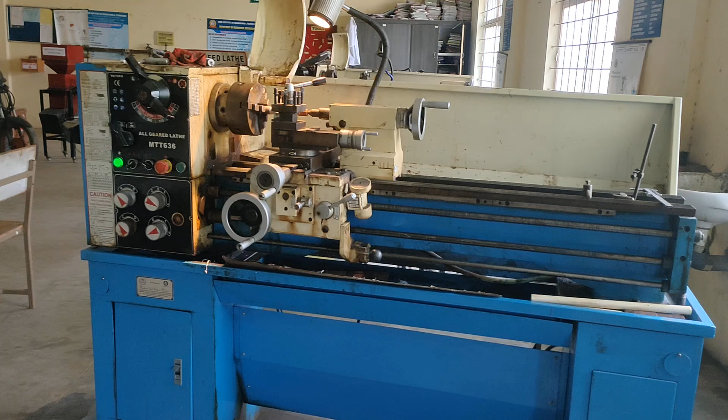Hi friends, today I am going to explain how to do one more lathe operation, that is the taper turning operation. How to do the taper turning operation with the help of the compound slide method. So let's see the operation.

Before doing the operation, coming to the aim of the experiment: to perform a taper turning operation with the help of a compound slide on a given workpiece using a lathe machine. So that is the aim of the experiment. Coming to the material required for this particular experiment, we want one lathe machine.

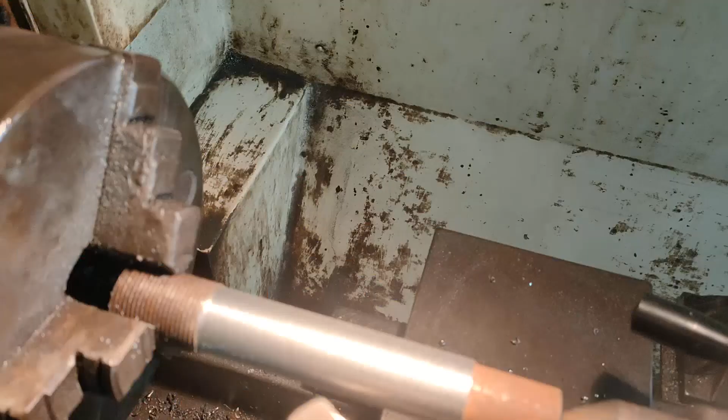Let's see what are the tools required for this operation. One workpiece and chuck key, one marking block for centering operation, one vernier calipers. So these are some of the tools required for doing the taper turning operation with the help of the compound slide method. Let's come to the taper turning operation.

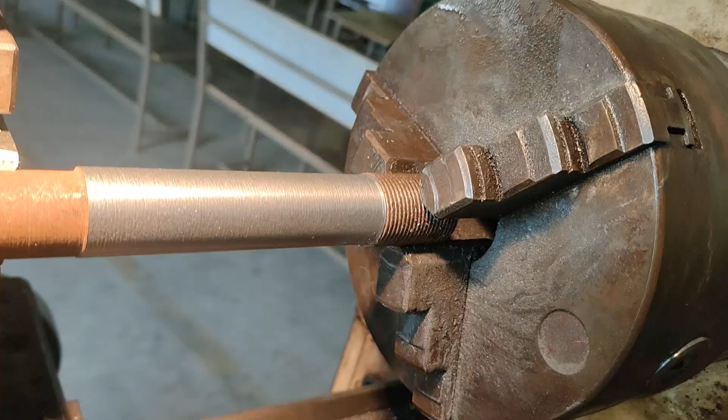First of all, you have to take one workpiece that should be fixed on a 3-jaw chuck in this way. Then you have to take one cutting tool, a taper turning cutting tool like this, that should be fixed on a tool post in a similar way. Now coming to taper turning.

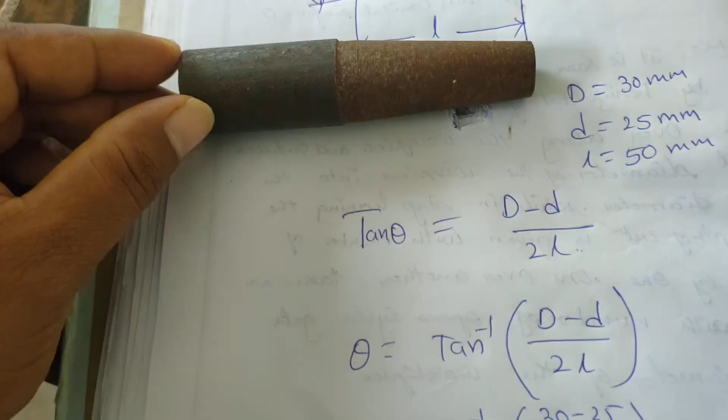What is taper turning? Taper turning is nothing but changing the diameter of the workpiece. So this is the diameter of the workpiece. Changing the diameter of the workpiece from one end of the workpiece to another end. So there is a slight change from one end to another end. This operation is called taper turning.

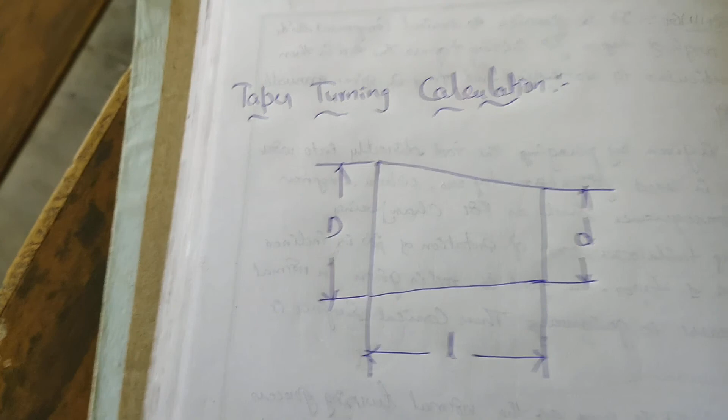Let's see the experiment. So this is the major diameter of the workpiece. This is the minor diameter of the workpiece. This is the length of the workpiece. I have taken the diameter as 30 mm. So this is the 30 mm. This is the minor diameter as 25. Length is 50 mm. So this is the minor diameter 25. This is the length of the workpiece.

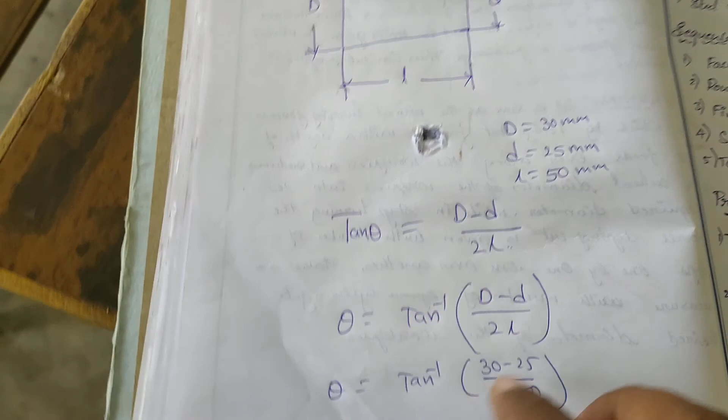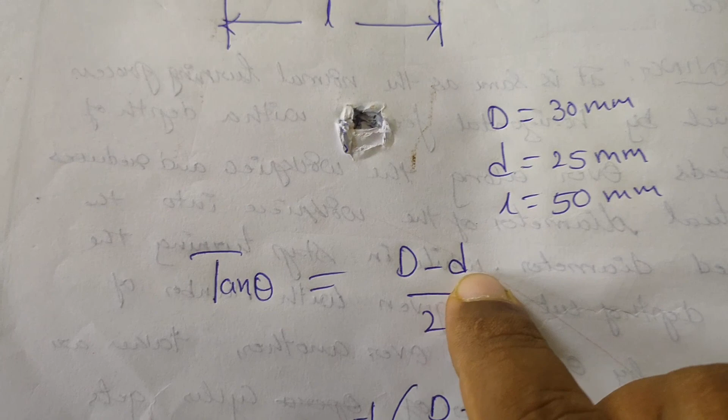So coming to how we are adjusting the angle. For adjusting the angle, we have to take tan theta equal to (D minus d) by 2 into L, where D is the major diameter, small d is the minor diameter, and L is the length of the taper. So this is the length of the taper. So after doing calculations, theta equals tan inverse of (D minus d) by 2L.

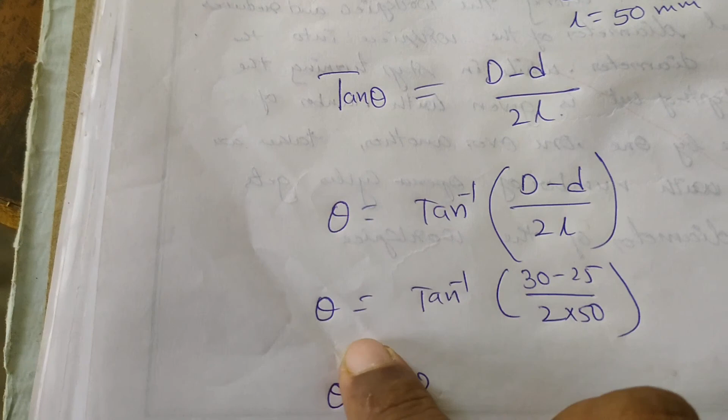So after calculations, we will get some value. We will see the adjustment of this particular value. So we will get 5 or 6 degrees. We can do the calculations.

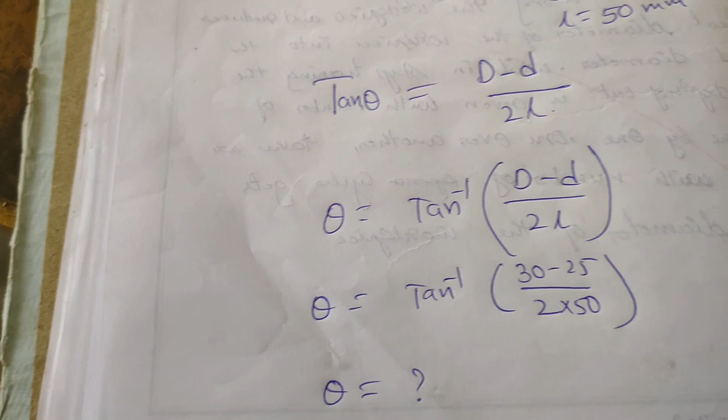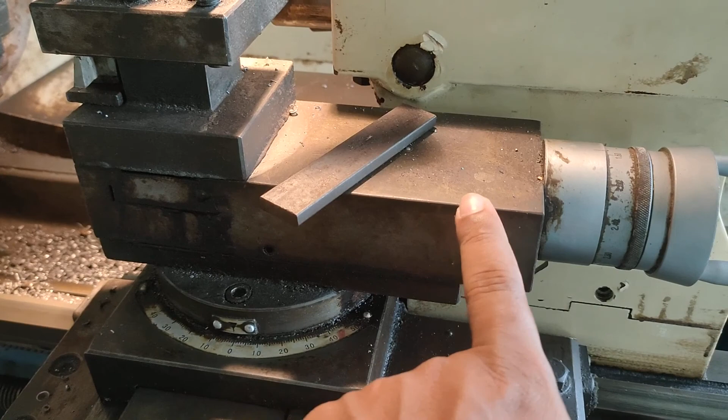So now coming to the compound slide method. This is the compound slide. The compound slide method is mainly used for producing short length tapers on a given workpiece. This is the short length job. So if you want to produce short length tapers on a given workpiece, you should use taper turning by the compound slide method. So this is the compound slide.

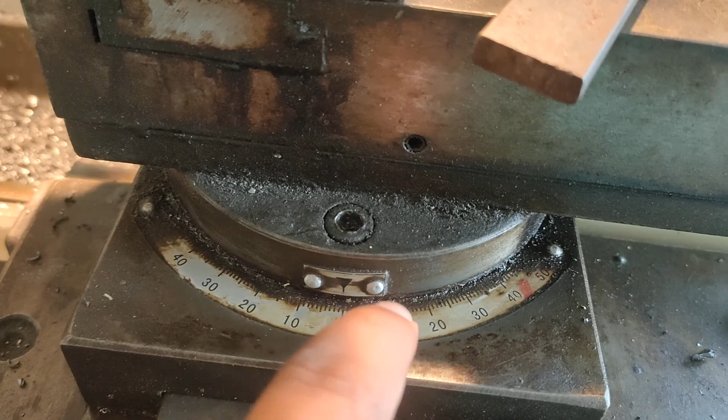By using this particular device, we are producing a taper on a particular workpiece. That's why this is called taper turning by the compound slide method. For doing the compound slide method, this is called the swiveling plate. So this is the swiveling plate. You have to adjust the angle of the taper. So I have taken the angle as 5 degrees.

So this is 0 degrees. Now this position is 0 degrees. I have to change the angle to 5 degrees after calculations. So according to yours, you can take your own angle.

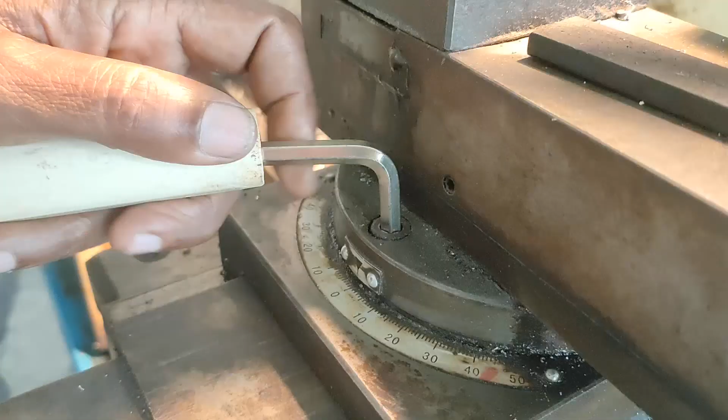So I have taken here 5 degrees. So now I have changed the 0 to 5 degrees. Let's see how we can change the 0 to 5 degrees. If you want to change the angles on this particular swiveling plate, you can loosen this particular screw. So I will loosen this particular screw. Let me see. So in this way we can loosen that screw with the help of an Allen key.

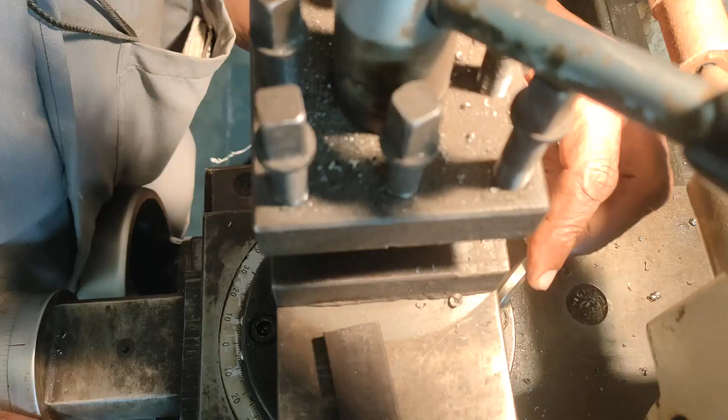This is the swiveling plate screw. To loosen that swiveling plate screw, we are using an Allen key. At the rear end of the compound slide also, you have to loosen this particular screw. This is the particular rear end screw. There is one more screw. We can loosen that screw also. So this is the front end screw. This is the rear end screw.

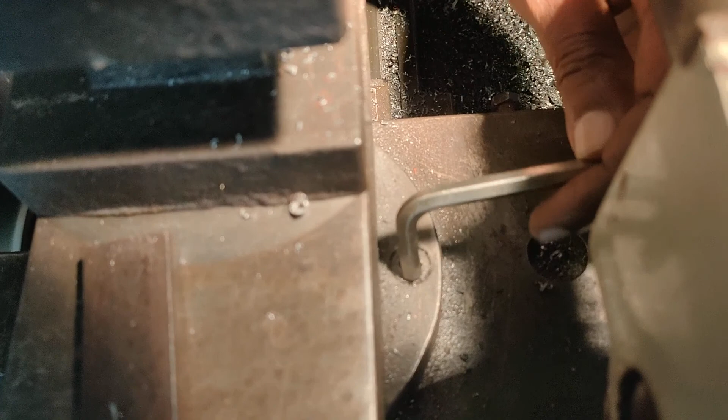So you can loosen that screw also. You can loosen this screw as well as this screw. So in this way you can loosen that screw with the help of an Allen key. This is the rear end screw, rear end of the swiveling plate. Now I am adjusting the compound slide from 0 to 5 degrees. Let me see.

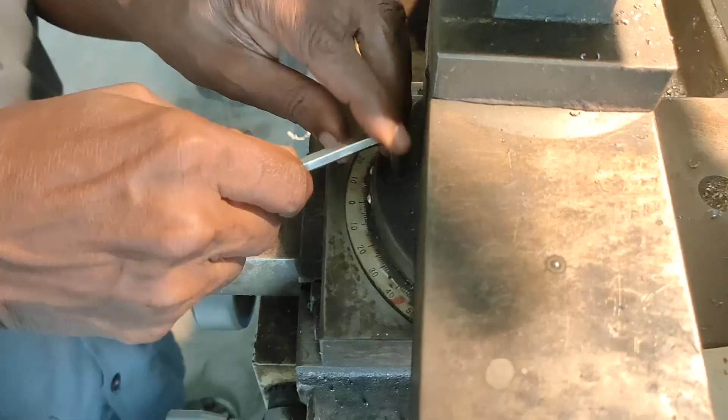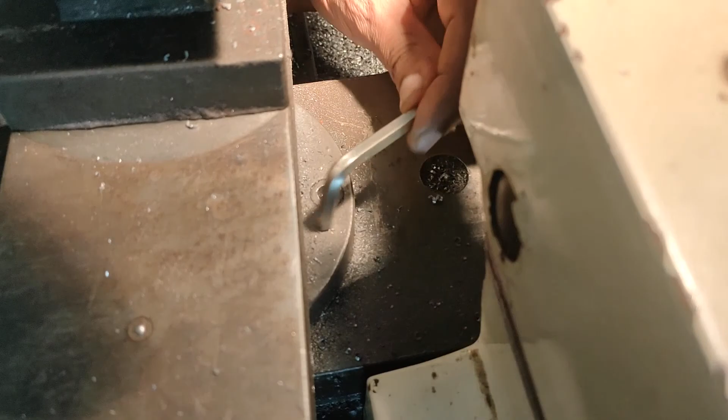So this is the 5 degrees angle I am using here for producing the taper. So in this way you can adjust the compound slide by loosening the screws on the swiveling plate. After that you can tighten the screws with the help of the Allen key. So in this way you can tighten that. In the rear end also, in the same way. So you can tighten this. In this way you can tighten the rear end screw also.

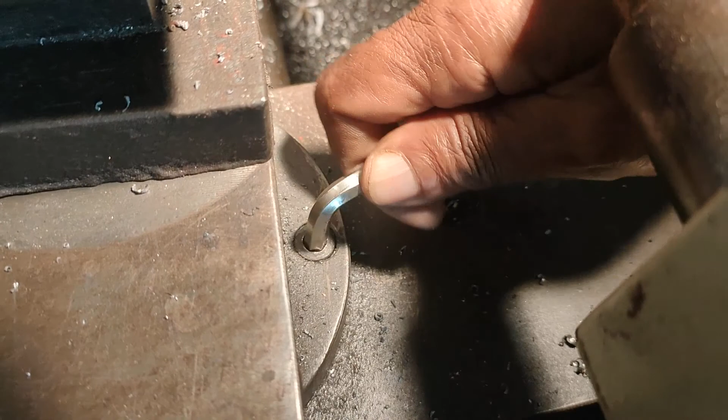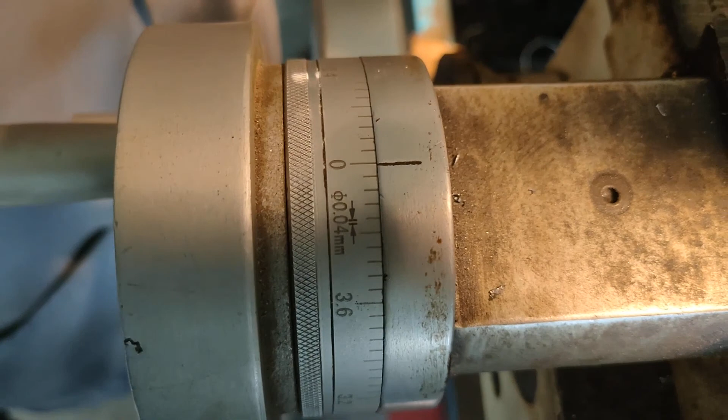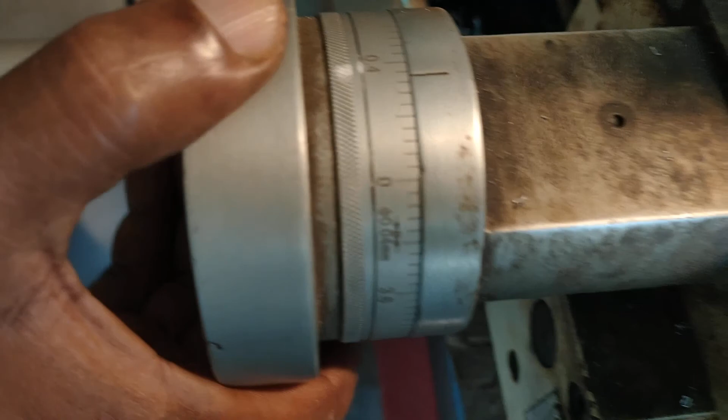Now you can contact the cutting tool with the workpiece. So there is a light contact. That contact I am treating as 0 mm. So you can adjust with the help of the micrometer which is on the cross slide. So now we are increasing the depth of cut from 0 to 0.4. So this is the depth of cut. For giving depth of cut I am using the cross slide handle.

For giving feed in taper turning with this attachment, I am using the compound slide handle. So this is the compound slide handle. Let's see how the feed is given. So now you can move the compound slide handle. When we are moving the compound slide handle, tool feeding is going on. So this is the tool feeding going on.

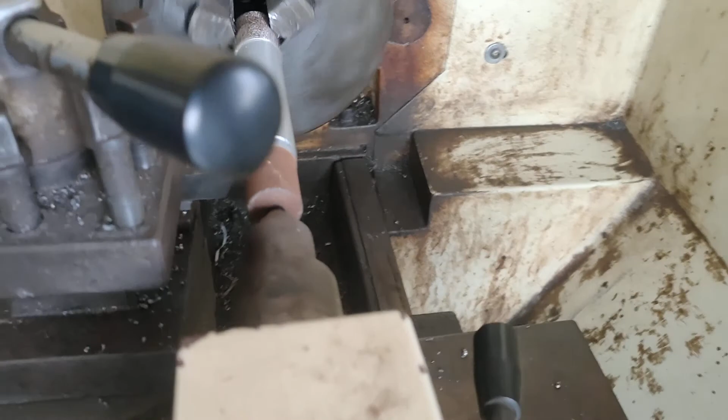For movement of the tool, you have to move the compound slide handle only. In most cases, for movement of the tool we use the longitudinal feed handle, but here, especially for feeding of the tool, we are using the compound slide handle. Now we have to increase the depth of cut from 0.4 to 0.8.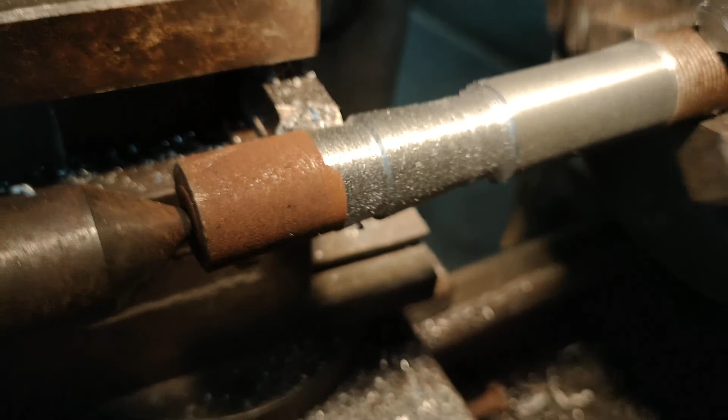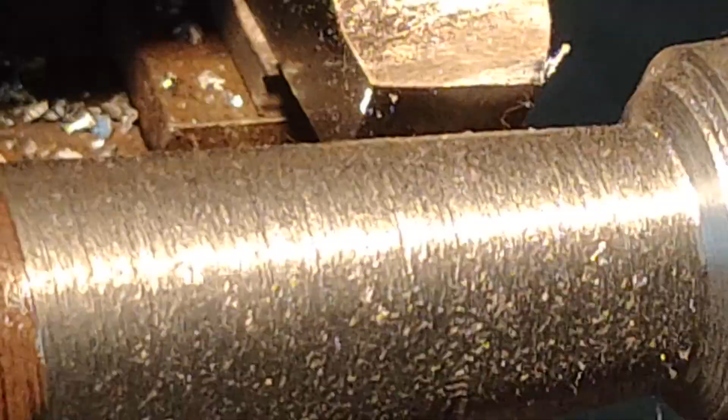In this way we are doing the taper turning operation with the help of the compound slide. The compound slide method is mainly for producing short tapers as well as steep tapers. So let's see the final output. Once the operation is completed, you can switch off the machine. So this is the final output of taper turning.